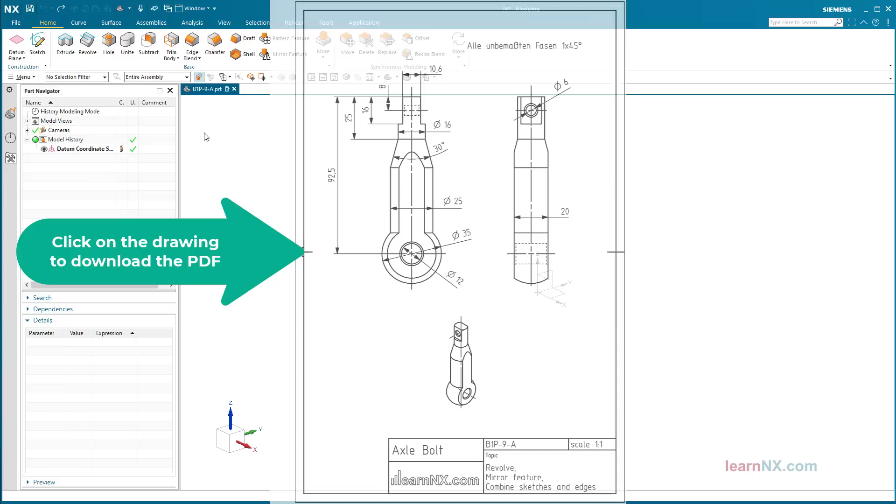Foreword. Welcome to the next additional course. This additional course does not teach anything new, but gives you the opportunity to check and consolidate your knowledge. If you prefer, you can try the course without watching the video, download the drawing and start immediately, or watch the video first and then follow the steps.

The work steps: Start the sketcher, press the middle mouse button to place the sketch on the XY plane. Sketch and dimension the profile of the turned part.

Finish the sketch and start the revolve command.

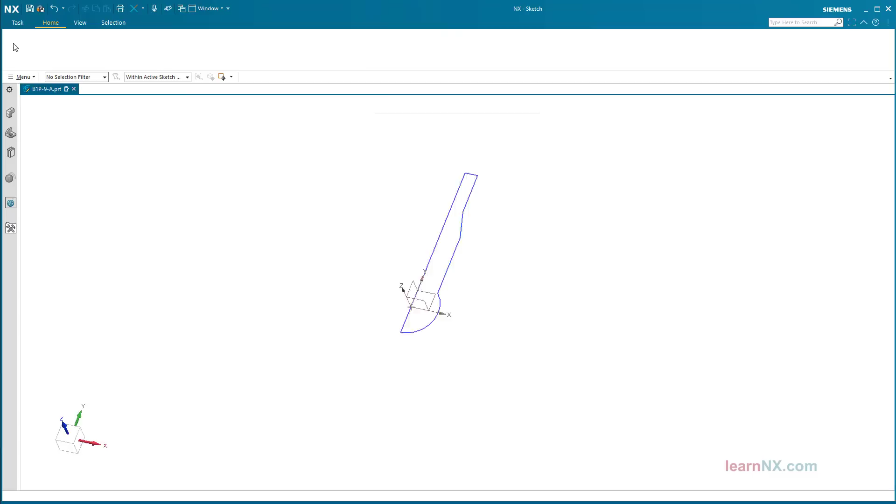Start the trim body command and create the datum plane you need.

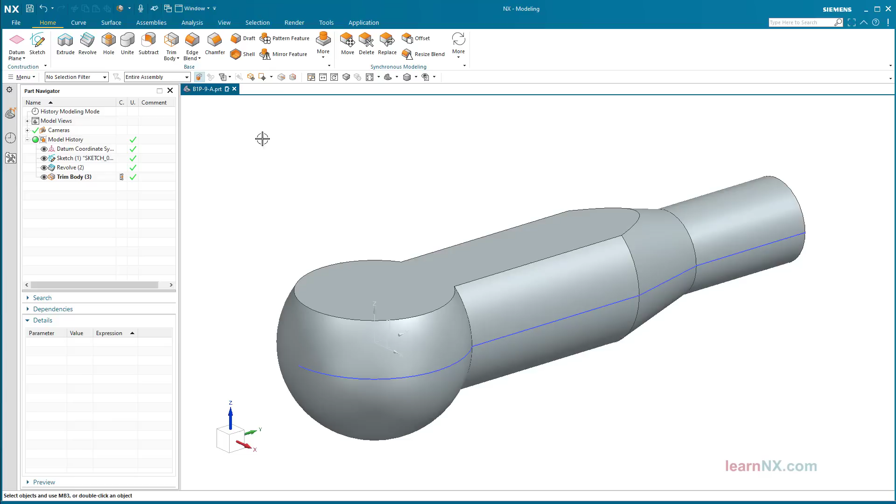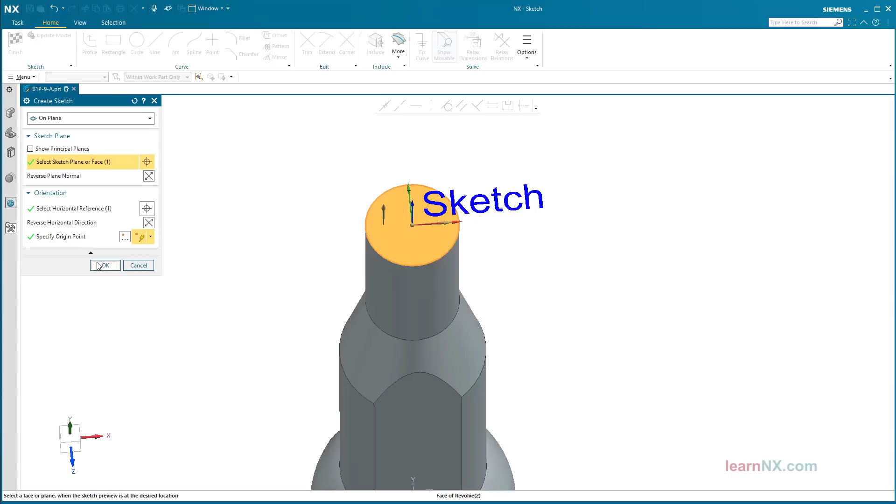Place the next sketch on the face. Create and dimension only a single line.

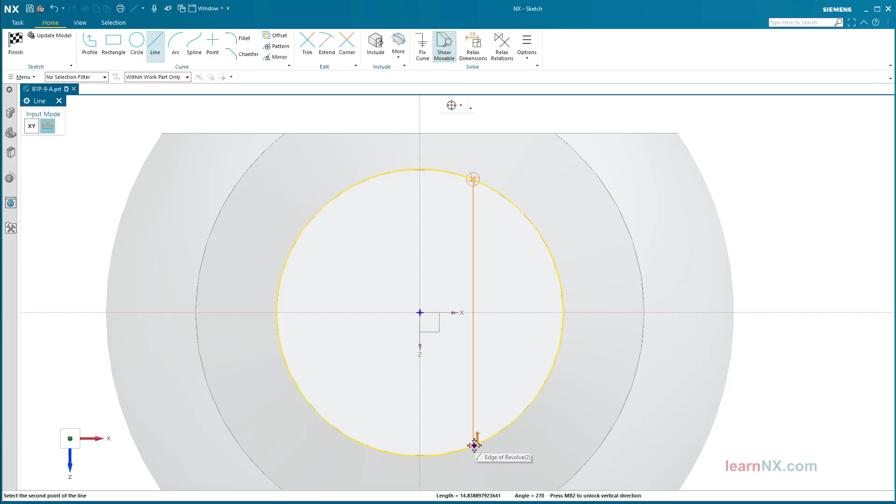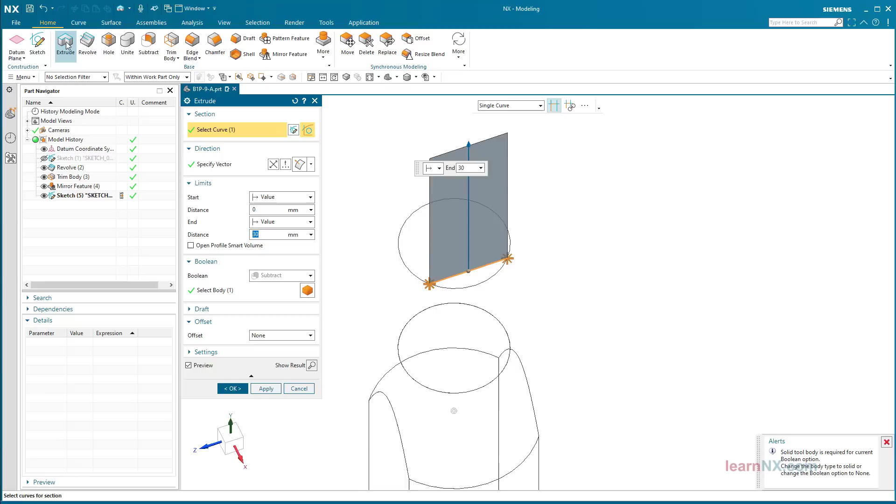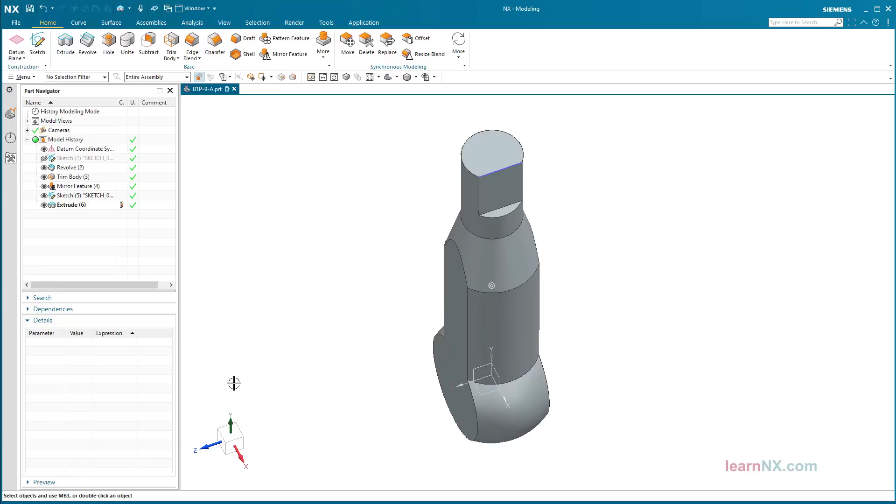Mirror the last work step.

Create the 12 hole as a simple hole with the hole size custom, and use the center of the trim plane for placement.

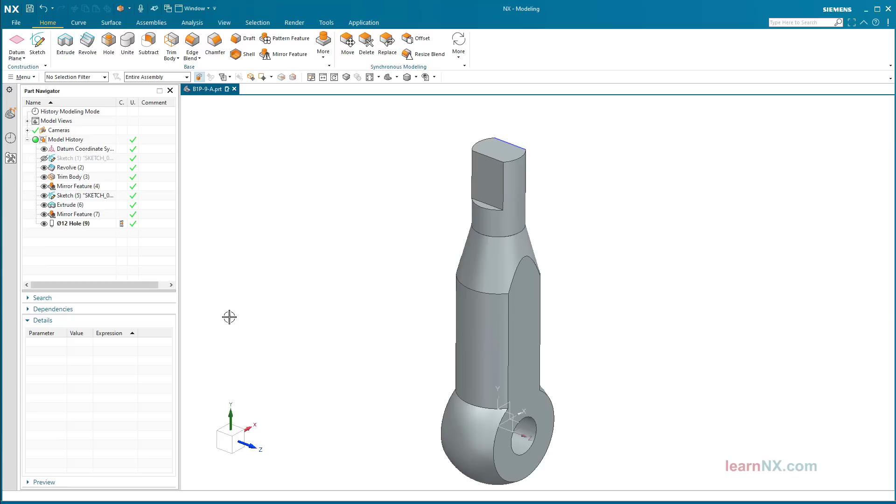Create the Ø6 hole as a simple hole with the hole size custom, and use a sketch for placement.

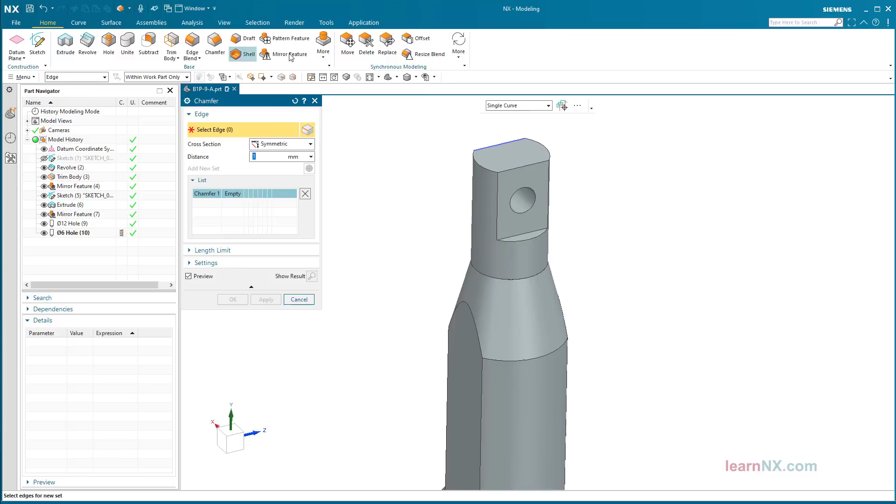Create the chamfer. The curve rule face edges can save a few clicks.

Conclusion. Did everything work? Then start a few more experiments. Change the wrench flat by 90 degrees, or create a flat counterbore on both sides of the large hole.